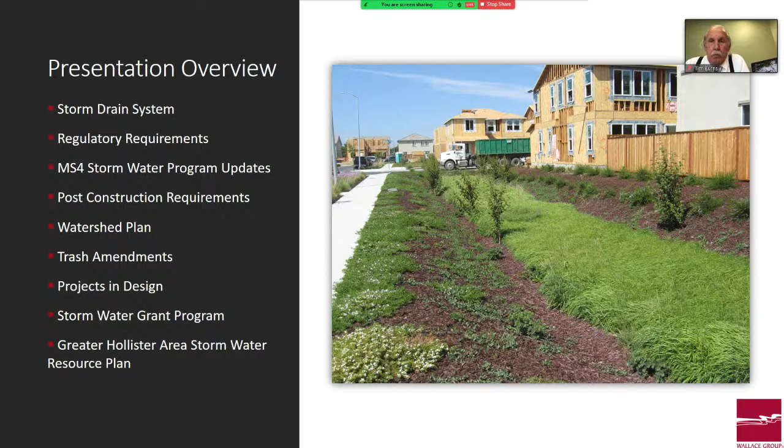We've been doing your utility master plans, stormwater being one of the major elements, working with the city on many facets of the stormwater components within your system, including infrastructure and regulatory requirements. Today we are going to present an overview of the storm drain system, regulatory requirements, your MS4 stormwater program, post-construction requirements, watershed plan, trash amendments, projects currently in design, the stormwater grant program, and the Greater Hollister Area Stormwater Resource Plan, which is actually the driving factor for this workshop today.

So a quick update on the storm drain system itself. Several years ago, Wallace Group completed a storm drain master plan. Your system is comprised of 59-plus miles of storm drain piping of various diameters, over 1,200 storm drain manholes, over 1,800 storm drain inlets, and 8 drainage basins, of which 4 are terminal basins and 4 are detention basins, meaning the water comes in, fills up, and then flows back out to the river. Then you have 20 river outfalls.

8 of them flow to the San Benito River, and 12 flow to the Santa Ana Creek, both of which are tributary to the Pajaro River downstream, going into Santa Cruz County and Monterey County.

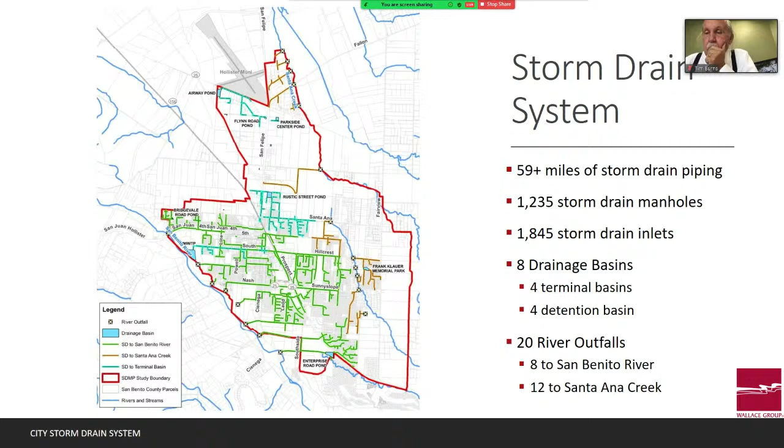So what work has been completed so far? In 2011, we did your storm drain master plan and identified 19 capital improvement projects related to stormwater. You can see a couple of the streets shown here. Fortunately, 2010 was a very wet rain year, so we were able to get several pictures of flooding areas and areas of concern.

The city has since completed one of those projects, the 4th Street Improvement Project, CIP 1609 and 1612. This was a road improvement project that also addressed stormwater improvements.

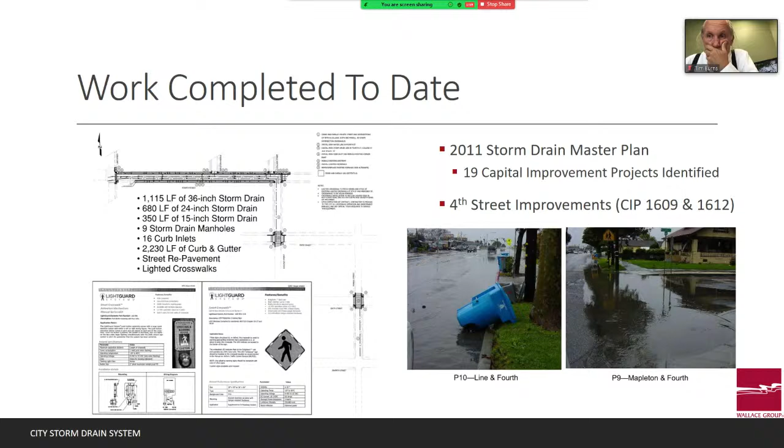Glenn Ryder has been working with the city over the past few years, assisting with MS4 compliance. He is unfortunately out sick, so I am going to attempt to convey the MS4 stormwater permit information, but I am not the expert on it, so please be gentle with me on this subject matter.

So what is an MS4? It's a Municipal Separate Storm Sewer System - M with 4 S's. This is the conveyance or system of publicly owned storm drains, gutters, roadside ditches, grassy swales, sediment ponds, and similar features. As stormwater flows over the land, it collects water, which also picks up a mixture of pollutants deposited by natural and human activities.

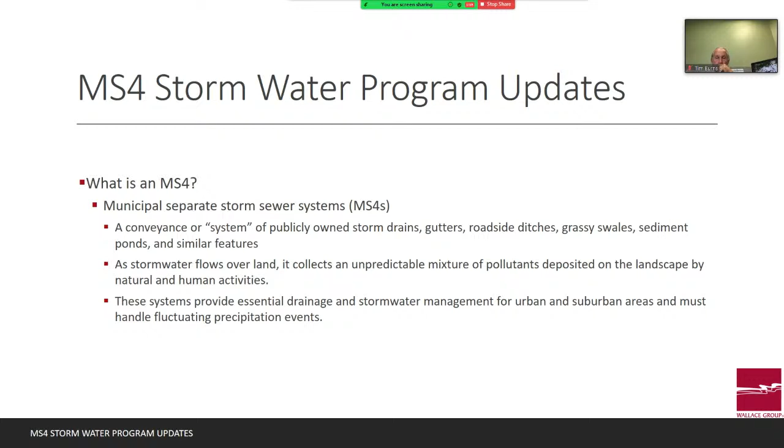So you've got oils and greases from cars, fertilizers, dog waste, and so forth. All of that gets picked up in the stormwater, flows to your gutters and drainage system, and out to the creeks. These systems provide essential drainage and stormwater management for urban and suburban areas and must handle fluctuating precipitation events, meaning your stormwater system has to be able to handle a wide variety of storm events over the years.

So what is the background with an MS4 permit? This is something that's on the newer side for municipalities. Back in the early 2000s, the Clean Water Act was a federal act that was enacted, and the National Pollutant Discharge Elimination System for MS4s. Phase 1 is over 100,000. You guys are in phase 2, which is 20,000 to 100,000 population.

This enacted the construction general permit. Subsequently, the California MS4 general permit includes total maximum daily loads, the trash capture order, and the regional order for the post-construction requirements. Those orders have come subsequent to the early 2000s when the Clean Water Act was enacted, implementing the MS4 permits.

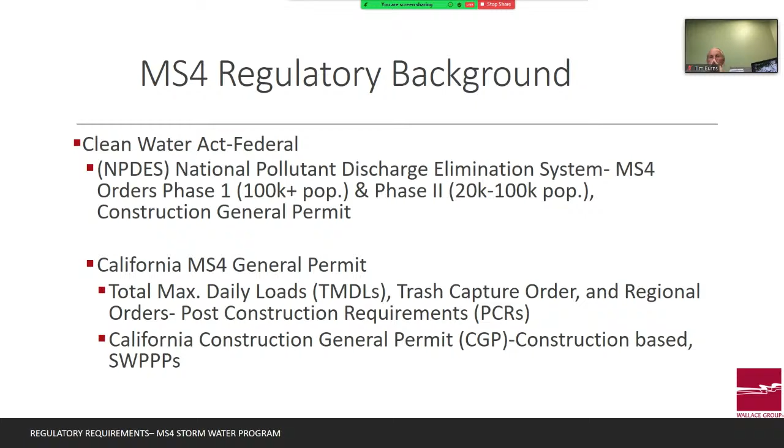Included in there is also the California Construction General Permit, which is oftentimes what you'll hear as the construction-based SWPPPs, Stormwater Pollution Prevention Plans. So these are all regulations that the city, as well as construction, either pre-construction or post-construction, have to comply with, as well as the city operations. So this is where we're all regulating different forms of stormwater before and after construction.

By the way, if you guys have any questions as we're going, this is a workshop. It's meant to be interactive. Feel free to interrupt me, ask me questions. I'm happy to answer them as we're going through the workshop.

Your MS4 system boundary. This is your city boundary. And what you're seeing is your city boundary and the various sub-watersheds within the city. All of these sub-watersheds flow to an outfall of some sort, and they go to the receiving water. So what is a receiving water? It's defined as a body of water such as an ocean, stream, river, pond, lake, and it's defined as where stormwater is discharged. This is where stormwater runoff collects and concentrates pollutants to impair recreational function of receiving water bodies by causing harm to aquatic life and potentially to humans.

So that stormwater collects on your streets. It collects all those pollutants, the waste, the oils, the greases, everything collects into the stormwater, and it heads out to San Benito River, where then it infiltrates into the ground. When the river is running, it is included there. The aquatic life, everything is inhibited by the stormwater, by those pollutants. And when you get large concentrations, that's when you start seeing aquatic life being harmed by these pollutants. It's something as a society we need to protect the environment.

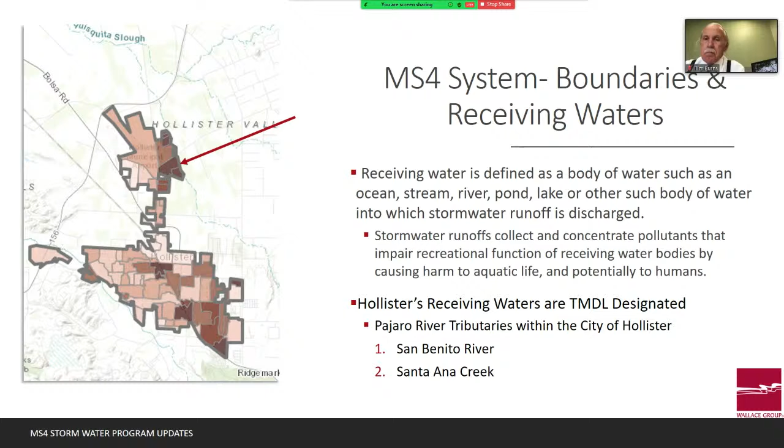So Hollister has two receiving waters, San Benito River and Santa Ana Creek. Those are the two rivers that we are focused on at this time. So I've talked about total maximum daily loads, and there's a lot of words on here. But basically it is a list of constituents that we have to analyze, that we monitor, and there are total maximum daily load limits that can enter the stormwater that once we go above that, it becomes harmful. We've identified them as being harmful to aquatic life.

And so one of the largest in each of San Benito River and Santa Ana Creek, what you want to pull from this, is the fecal coliform and the sediment have been identified as total maximum daily loads. The city has frequently surpassed the total maximum daily loads for fecal coliform and sediment, which means it's picking up waste and that is entering into the creeks and river. And so the Regional Water Quality Control Board, which is the regulating body, has identified those as issues and constituents of concern for the city.

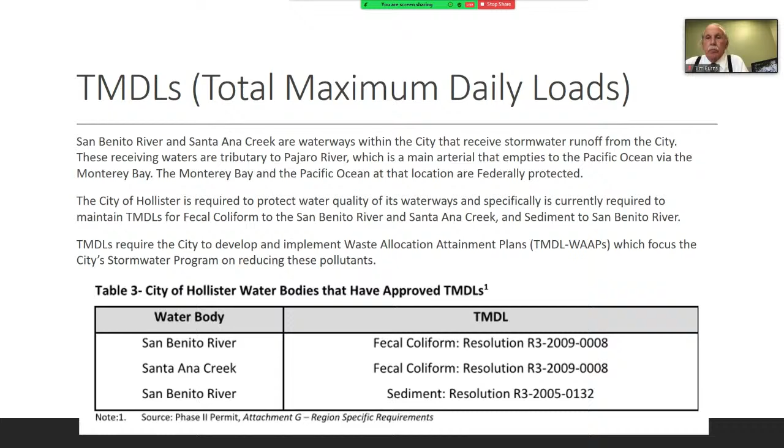So what are the minimum requirements for the MS4 stormwater program? It comes in two parts. The first part is what we have to measure. So we do planning, we do implementation, and then we assess it. There are 6 components to the first program. The first part is public education. That's why we send out newsletters in your water bills and so forth. We put information about trash capture, information about picking up your dog waste. This is all stemmed from these programs.

Public outreach, again, it's why we're having this workshop. It's the public education. The more you know and understand about how your trash impacts the water quality, the more likely you are to go and pick up that piece of trash when you're walking down the street and cleaning up the streets. Illicit discharge detection and elimination. We want to make sure that there are no illicit discharges, wrongful discharges into our stormwater collection system, that we are monitoring those connections.

Construction site stormwater controls. When a project is under construction, we do not want sediment running off of those project sites and into your storm drain system. That sediment is a major polluter to the river channels. As well as it's a maintenance nightmare to your operators, because they have to clean that sediment.

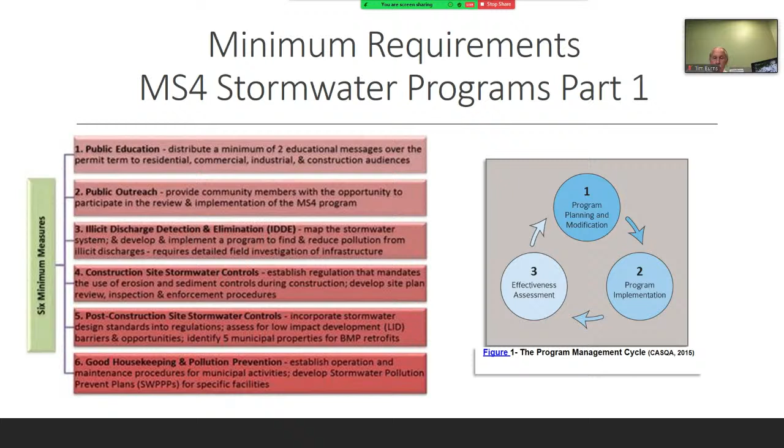Part 2 of the MS4 stormwater program is quantification of the pollutant loads and estimation of pollutant load reductions achieved by the program as a whole. So now we have all of these 6 programs that are implemented. How do you actually identify whether or not they're working? So the city has a program software. It's run by Second Nature.

It's a program where we have inputted all of your drainage information, all of your best management practices, the low impact development. Tell me if you don't understand some of these words that I'm throwing out there, but these are all stormwater improvements. We put them into a program that tells you how much bare land you might have, how much development you might have, and it identifies how much pollutant loading you might have going to a specific outfall.

And then, as the city is implementing new projects, we put those new projects into the program, and it then tells us how much reduction we've had in pollutant loading. So we know where the highest pollutant loaded areas are based on topography, based on bare ground, based on the urbanization of the streets, many different factors that go into it.

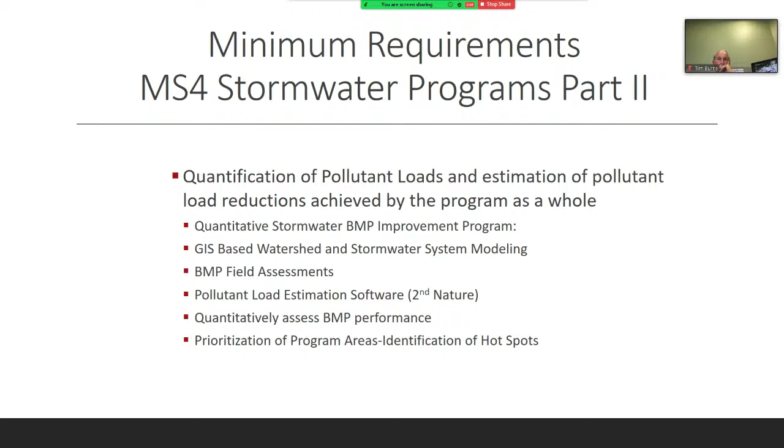And then we identify and target the best management practices that we can implement, either operationally or physical projects that we can put in, and then we identify where and how we're going to reduce those pollutant loadings. So that's part 2 of the program.

So what has the city done to date? First off, we have a GIS-based storm drain model that has identified all of the watersheds within the entire city. We've done a quantitative analysis using a scientifically defensible pollutant load analysis, the Second Nature program, and we've prioritized the priority areas for required municipal inspections.

So we have to go out every so often and actually inspect those detention basins, the physical facilities, full capture systems, whatever we might have, to make sure that they are living up to their design parameters. The city has prepared a TMDL-WAAP, which is a monitoring program that has to be done. The biggest thing is making sure that you do it after what we call the first flush.

The first flush is the very first storm of a rainy season. That is the storm that is going to carry the highest pollutant loading. You drive all summer long, all your cars are leaking oil, gas, everything, and all the pollutants collect over the summer. That first storm is going to have the highest pollutant loading of the season, and so we call that the first flush. That's the one that is most important to collect stormwater and treat it.

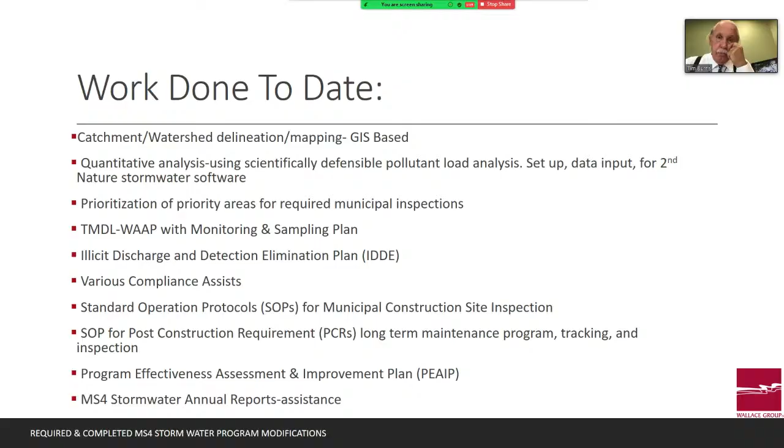Maybe you could help visually. The storms of 96, 97, what did they rate at? Where we had a lot of rain and the river was knocking down some bridges. Do you know what that was rated? Let me see if I can look it up, and I can get back to you. Thank you. Valerie, if you're listening, maybe you can look it up and text it to me. Or when she gets on here shortly, she might know the answer.

Any other questions? All right, moving on. So Valerie's going to now talk about post-construction requirements. Go ahead, Valerie. Oh. She's still muted. Good evening. Want to confirm that everybody can hear me? Yes, we can. Excellent. Thank you. And thank you, Carrie, for the introduction.

So tonight I will be talking about the post-construction requirements, otherwise known as the PCRs. These are requirements that were developed by the regional board with the goal of reducing pollution that reaches our waterways and also minimizing erosion and other impacts to the creeks and streams. And these PCRs are required through your MS4 stormwater permit that Carrie was describing. Next slide, please.

So first I'll go through a brief overview of what the post-construction requirements are. They are a set of 4 different tiers, each having a different level of care for stormwater. The tier system is based on the amount of new or replaced impervious surface that a project will create, which is important because these requirements also apply to redevelopment projects.

There are some exemptions for maintenance, such as repaving or overlaying an existing roadway. Tier 1 is called site design and runoff reduction, and it requires that you include some form of low impact development in your project. That means trying to hold water on your site by directing runoff to a landscaped area, or possibly including a rain garden, a low-lying area on your site that would hold stormwater and not allow it to run off.

Tier 2 is water quality treatment, and the regional board has identified a specific storm for which you have to treat all the runoff. This can be done in a landscape-based feature, like some type of vegetated swale, which would be considered low impact development and is preferred by the regional board. Or water quality treatment can be achieved in more of a mechanical means, which would be some type of filter system generally placed underground in connection to your storm drain system.

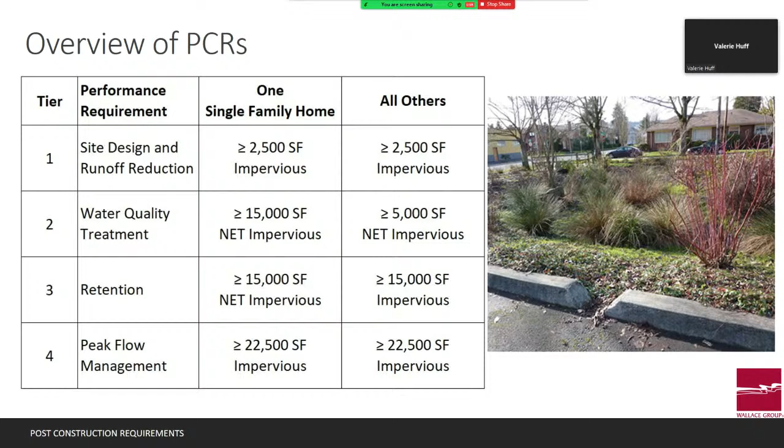The city has identified and understands that implementation, meeting these PCRs on each project site, can be a challenge. It's especially a challenge for project sites that have a more dense clay type soil to try to hold a lot of water on their project site.

So working with the city, we have been developing what's called a watershed plan. That plan is specific for an alternative compliance for the post-construction requirements. The PCRs are intended to be implemented on each project site, but by having a regional program such as a watershed plan, the PCRs can be met in a regional facility, such as a larger basin. This has benefits for both the city and the community.

Primarily for the city, this will reduce the time, effort, and complexity of your operations and maintenance program. As Carrie mentioned, for every stormwater facility constructed to comply with the PCRs, the city is now required to track the operations and maintenance and make sure those facilities are maintained, at minimum on a yearly basis, and that needs to be reported back to the regional board as part of your MS4 permit.

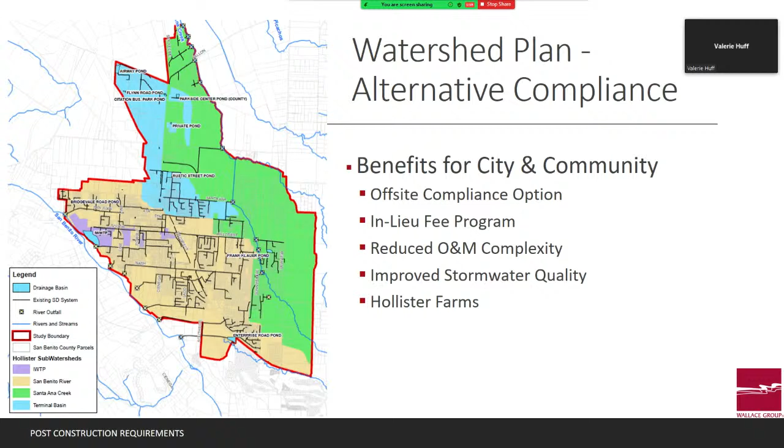Next slide, please. So what the Watershed Plan is proposing is that we would be diverting runoff that currently flows to the San Benito River. The Watershed Plan would apply to any development within a watershed that drains to the San Benito River, and that diversion would occur by sending runoff to the existing industrial wastewater treatment plant, shown there on the left.

The Watershed Plan proposes that Pond 2, an existing retention pond, would capture stormwater runoff. Then, if needed, that stormwater runoff would be pumped to the existing percolation ponds and percolate into the groundwater before reaching the river.

The primary diversion would occur at the existing storm drain outflow that currently discharges near Apricot Lane. The Apricot Lane outfall is just on the south side of Pond 2, and the primary diversion would send runoff from that outfall to Pond 2 instead of the river. We've also identified a few upstream locations where we could divert even more runoff through that Apricot Lane outfall.

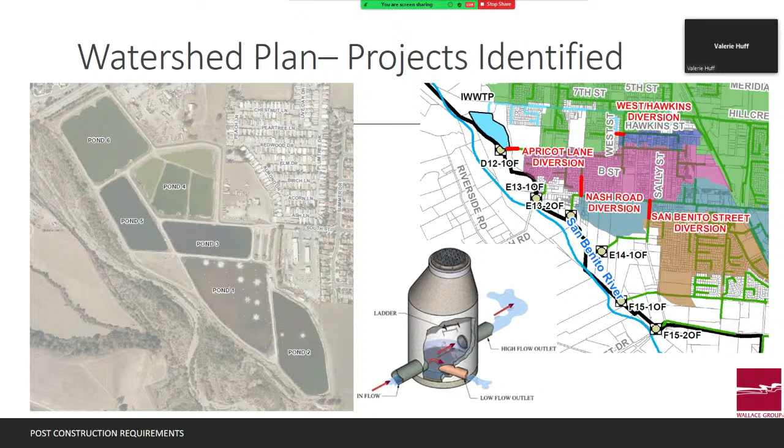And I'm ready for the next slide. Thank you. So there are some programmatic requirements through the regional board that would come along with the Watershed Plan. First would be an alternative compliance ordinance—this would be a new section in your municipal code outlining the requirements developers would have to follow to use this alternative compliance program.

Second would be the in-lieu fee program. This program would need to be developed and codified to specify what a developer will need to pay in order to use alternative compliance.

There's also compliance tracking—just as the city is required by the regional board to track operations and maintenance of PCR facilities, you also need to track how you're managing compliance if developers choose this alternative route. The city will also need to identify O&M procedures for any facilities used under this alternative compliance program, primarily the industrial wastewater treatment plant. By using the industrial plant for PCR compliance, the regional board now has the authority to request O&M documentation for that facility, and that's important to understand.

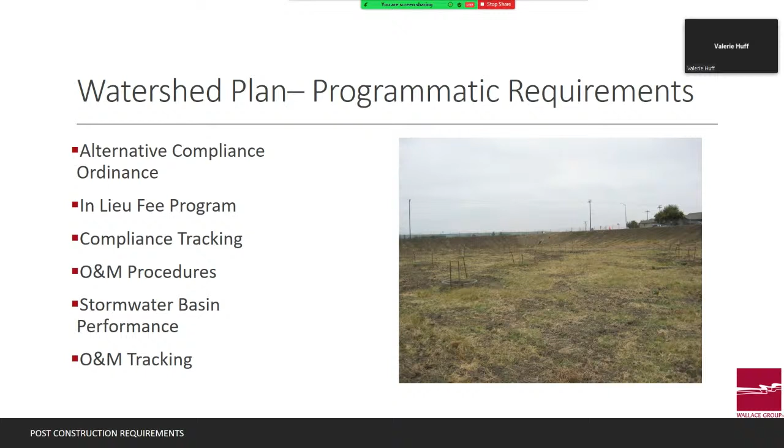So where are we with the development of the watershed plan? We submitted a draft, our first draft, to the regional board back in 2015, and we have gone through a number of rounds of comments with them back and forth. We are at a point where the regional board has stated that with some minor revisions, they are ready to approve the plan. It's undergoing final city review right now for submittal to the regional board.

After that watershed plan is approved, the next steps would be development of the in lieu fee program, updates to the city's municipal code, and also developing and finalizing tracking procedures for how the city is going to manage and demonstrate to the regional board which projects fall under this alternative compliance option.

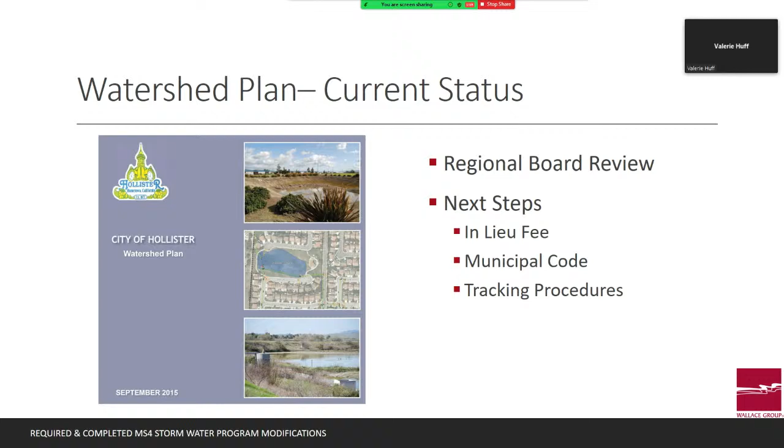I'm going to talk briefly also about the trash amendments, and then I'll stop for questions after I get through this section. Similar to the post-construction requirements, the trash amendment is a requirement through the MS4 permit program. The purpose of the trash amendment is to try to prevent trash and debris from entering a storm drain system. The State Water Board developed the trash amendment, and now the city is in charge of implementing it.

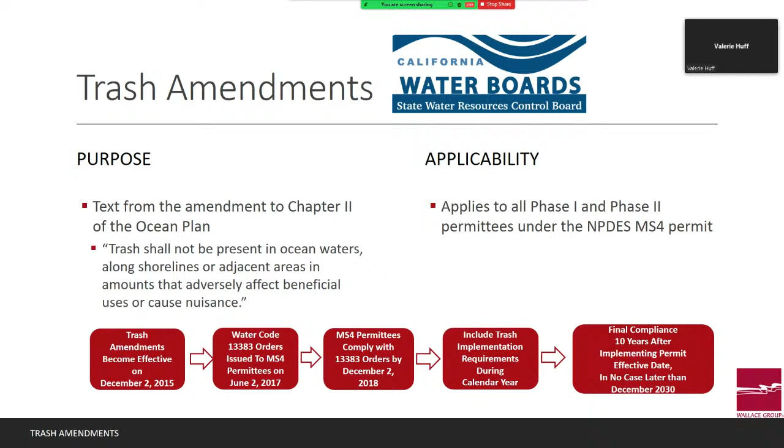Let's go ahead to the next slide. In 2018, Wallace Group worked with the city to develop a compliance memo for the trash amendment to identify the path forward. The city at that time chose what's called a full trash capture system. The intention is that a trash capture system would be installed at all of the major outfalls to either the San Benito River or Santa Ana Creek. Just of note, the Bridge Road outfall is the largest, and that's the most northern outfall to the San Benito River.

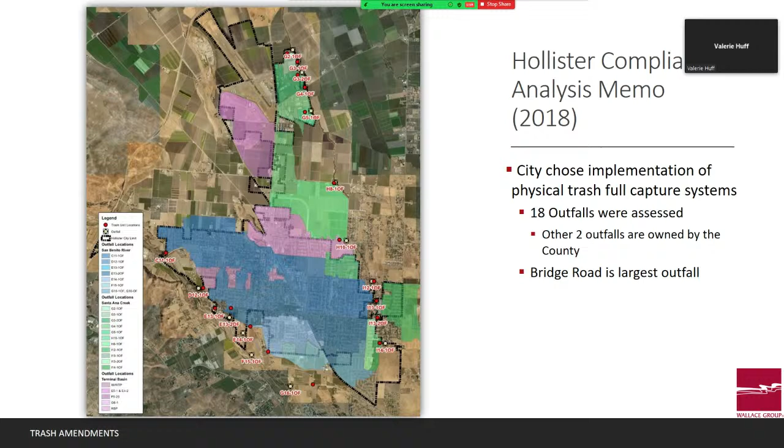A full trash capture system is a mechanical device that would capture all particles 5 millimeters or greater. So that's really small, down to the sediment level. Here we're treating water for not only the large debris, bottles, trash and leaves, but also some smaller particles that may have entered that stormwater system.

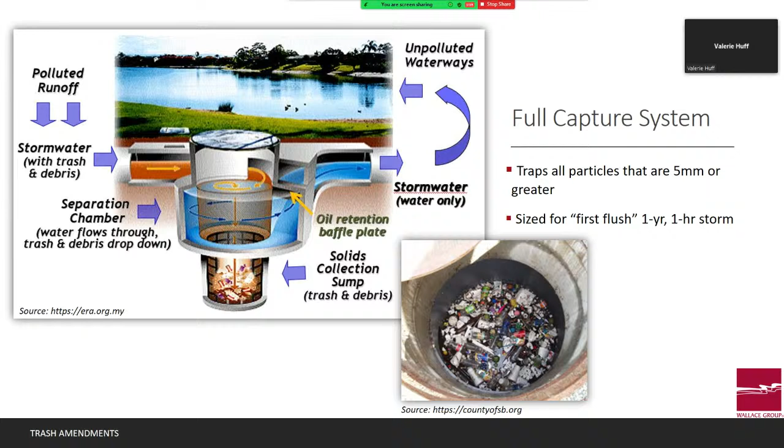These full capture systems are sized for the first flush storm, which Kari had described. This is typically analyzed as a 1 year, 1 hour storm. This is a typical storm you might see during the beginning of the rainy season that would mobilize all these pollutants that have been collecting in the storm drain system and in the right of way.

Next slide, please. Great. And so that's the end of my discussion specific to the PCRs and the trash amendment. I'm happy to take any questions that you might have before Kari jumps into some more detailed discussion on where we are in design of some of these projects. Is there any questions from anyone?

Councilmember Resendez? Thank you, Mr. Mayor. I do have a couple quick questions. So in regards to the watershed plan, are there any more cons or downsides? I saw you talk about a lot of the pros, and then you did talk about some programmatic requirements, but are there any other cons or downsides aside from what you touched as far as the programmatic requirements?

Sure. So the one con that's really specific for the city is that the first project we propose to implement for the watershed plan is the diversion of that Apricot Lane outfall. That's a sizable project that diverts a sizable volume of stormwater. So there's some potential that we move forward with the watershed plan, divert all that water, and then there's maybe not a lot of buy-in from the development community that wants to use that alternative compliance option. So there's some potential that your in lieu fees may not generate as much as we would like. Kari can talk a bit more specifically about where that project is in design and how it relates to some other stormwater requirements for the city. But in terms of cons, that would be the biggest one: you have to take a leap of faith to construct one of these projects, assuming you have one or two developers that want to buy in, and then you're counting on future developments to continue to pay those in lieu fees.

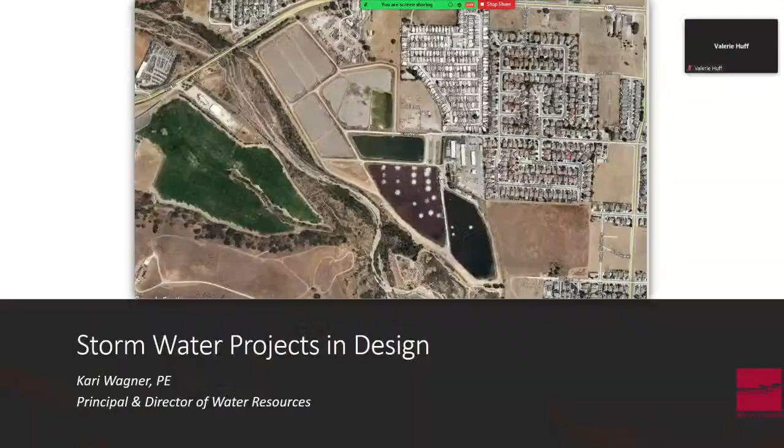Now we're going to talk about what stormwater projects are actually in design right now. We've talked a lot about upgrades to the industrial wastewater treatment plant. I've worked with the city council for several years on issues and discussions about San Benito Foods and the industrial wastewater treatment plant project. Let me give some background on the plant for anyone unfamiliar with the facility.

Pond 1, as labeled in this picture, is exclusively used at this time for wastewater treatment by San Benito Foods. The city has worked with San Benito Foods over the last couple of years, and they are now the sole operator of that facility—the city no longer operates or maintains that pond. They operate Pond 1 year-round but only treat wastewater during the summer months, June through end of October, which is almost finished as of today. Once they finish their canning season, they continue to operate and maintain Pond 1 but no longer discharge. During summer, they're allowed to discharge effluent to ponds 3, 4, 5, and 6, which are the percolation basins.

During the winter season—prior to this past year—Pond 1 used to overflow into Pond 2, which would then pump to ponds 3, 4, 5, and 6. We bifurcated ponds 1 and 2, telling San Benito Foods they are only using Pond 1. They've made improvements to Pond 1 for proper treatment of their effluent wastewater. The city is now retaining Pond 2 for stormwater capture. We've desludged Pond 2 and are in the final stages of that project, getting it prepped and ready for the diversion project.

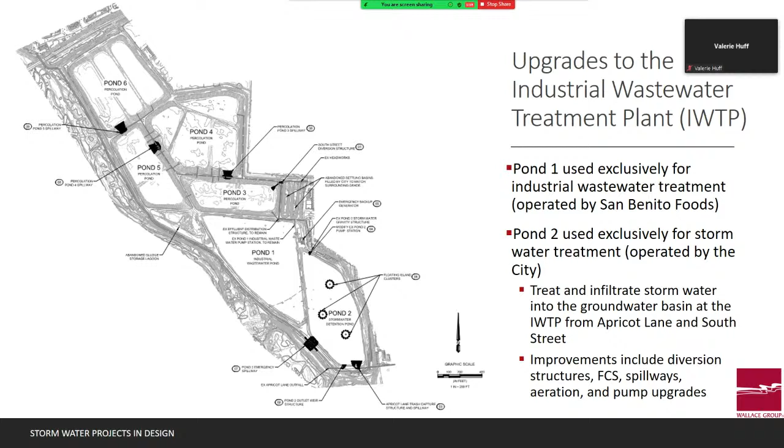So to wrap up this workshop, I will be going over the Stormwater Grant Program and the recent application that the city applied for, and the subsequent work that was required based on that grant program.

The Stormwater Grant Program is through the California State Water Resources Control Board. Its primary mission is to promote beneficial use of stormwater and dry weather runoff in California, and it does this by providing financial assistance through funding available through Prop 1, Assembly Bill 1471, authored by Rendon, which authorized $7.5 billion in water projects, and of that total, $200 million in grant funds were allocated for multiple benefit stormwater management projects.

Last year, round 2 of the Prop 1 grant funding was available for project applicants. In July of 2020, the city of Hollister applied for this grant funding, and the industrial wastewater treatment plant upgrades that Carrie was just describing were used as matching funds of $4.7 million. The trash capture project for Bridge Road, the largest watershed to the San Benito River, was used as the grant fund.

Earlier this year, the list of projects that were selected were published. Unfortunately, the city was not on that list, but we had discussions with the state. They said the application was favorably reviewed and that we were placed first on the standby list. So we're currently working with the state on that application.

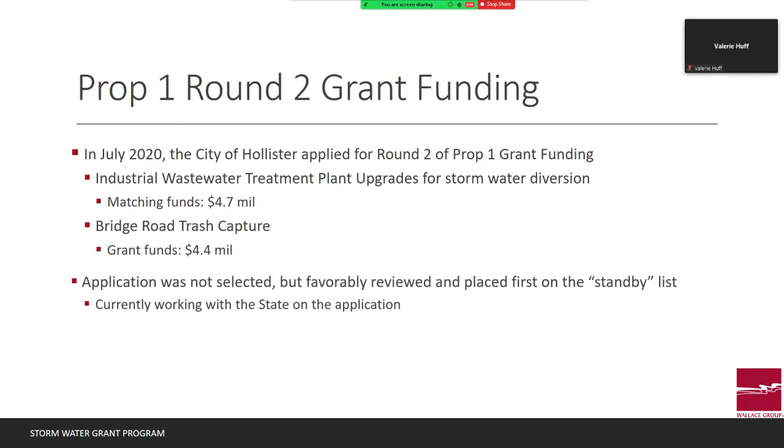As part of that grant, there is a stormwater resource plan requirement. So a stormwater resource plan is a condition of receiving grant funds for stormwater and dry weather runoff projects. And this comes from the water code and is implemented from any bond approved by voters after January 2014.

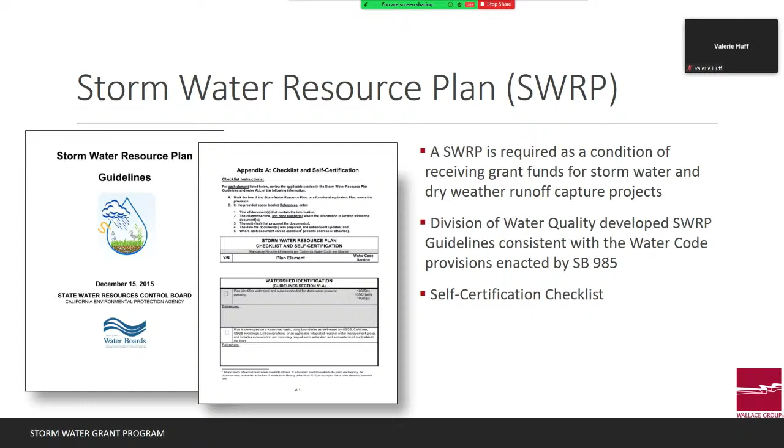So the Division of Water Quality developed stormwater resource plan guidelines consistent with the water code provisions enacted by Senate Bill 985. And in these guidelines, there is a self-certification checklist, which there's just a screen capture of what that looks like. And these help guide local agencies and people preparing the stormwater resource plan to make sure that it is consistent with the water code and the state water board guidelines.

So why is the stormwater resource plan important? Well, the key here for this type of plan is that it focuses on being a watershed-based plan. Traditional approaches to stormwater, like we've been talking about, typically include maybe limited treatment prior to the stormwater entering the storm drain system, and ultimately the receiving water bodies.

The focus of a stormwater resource plan is to focus on the natural hydrology within the existing landscapes in order to increase stormwater capture and use, and really manage stormwater as a resource and not something to just treat and discharge into our receiving water bodies. So a stormwater resource plan encourages multiple benefit projects, and it also incorporates the broader water management goals of the Integrated Regional Water Management Plan, the IRWMP, which in the city of Hollister's case is the Pajaro River Watershed IRWMP.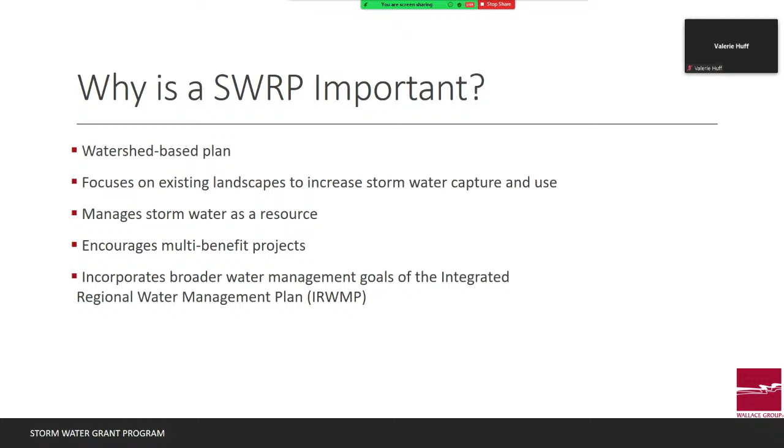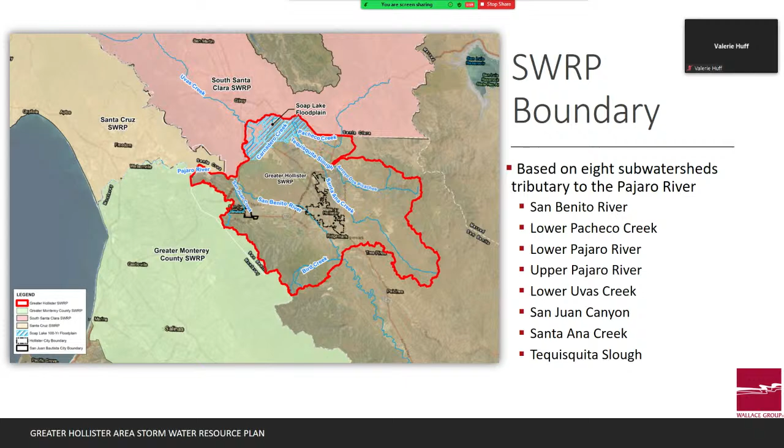So we really wanted to highlight agency collaboration. The City of Hollister is the submitting agency for when this plan gets submitted to the State Water Board. But we wanted to highlight that this has been a collaborative effort with City of San Juan Bautista, San Benito County Water District, and Pajaro River Watershed Flood Prevention Authority.

So for the identification of each of the stormwater projects, really back to focusing on that watershed-based planning approach in order to find projects that not only address water quality concerns, but also might have a flood control benefit, a water supply benefit, a groundwater management benefit. We solicited the different local participating agencies to help identify stormwater, dry weather runoff capture projects to include in this plan. And that resulted in 8 projects, 3 programs, 4 opportunities. 5 of the projects are within the city of Hollister and directly benefit the San Benito River. And this exhibit shows some of the different project components for the city's identified stormwater projects.

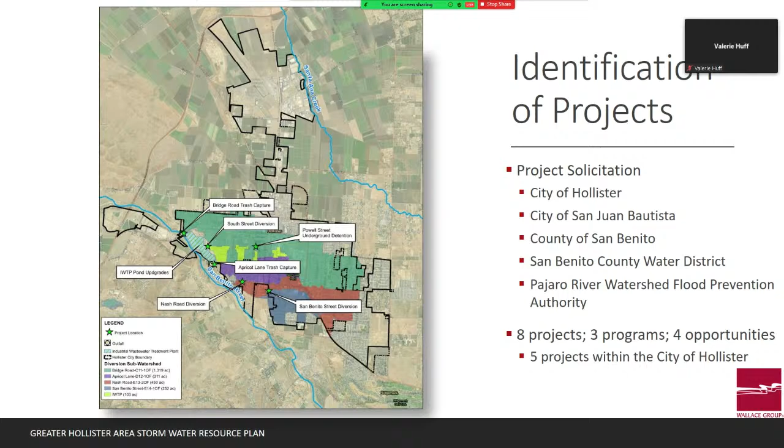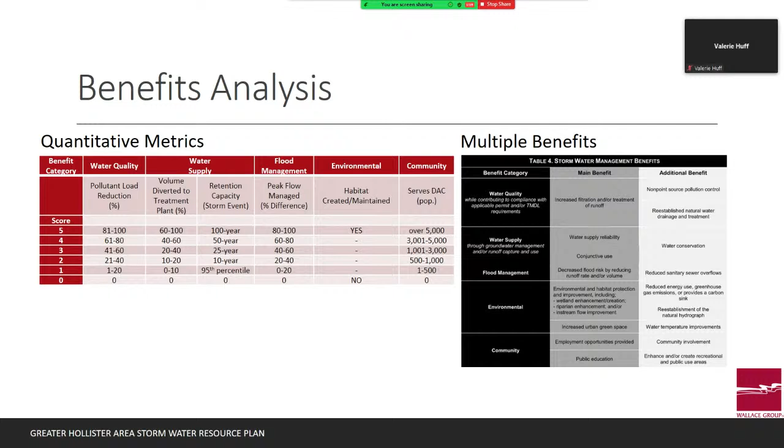So with the identification of the projects comes the benefits analysis. Each project was broken down into a quantifiable metric, which is shown in the red table. Using results from the stormwater modeling that had previously been done, we looked at several other studies that had different hydrology and modeling results. And there's also multiple benefits. This gray table is straight from the Stormwater Resource Plan guideline published by the State Water Board. It breaks down the categories into water quality, water supply, flood management, environmental, and community, and those are broken down into main and additional benefits.

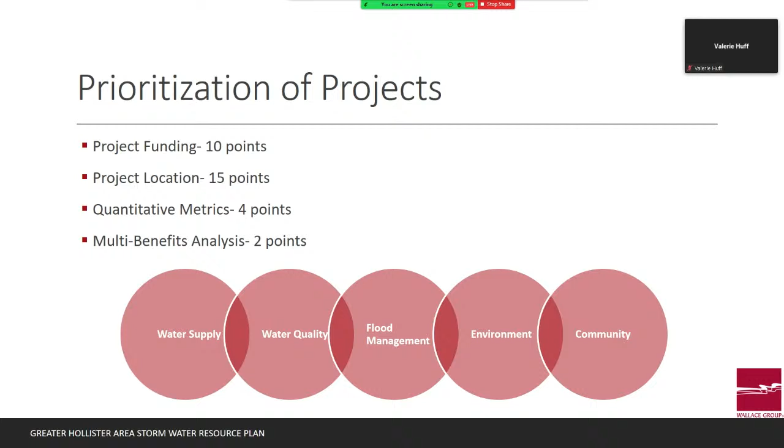So with that benefits analysis comes the prioritization of the different projects. If grant funding was secure, the project received 10 points. If the project was located on publicly owned lands, the project received 15 points. Quantitative metrics 4, multiple benefits analysis 2. And there was a total possible score of 100 points.

But it's really important to note that with this Stormwater Resource Plan, just the fact that these projects are identified in this plan, like I mentioned before, makes them eligible to receive that grant funding, regardless of their prioritization on this table.

So moving forward with an overview of all the projects that were identified in the Greater Hollister Area Stormwater Resource Plan. We have the industrial wastewater treatment plant upgrades that were scored the highest priority based on pollutant load reductions to San Benito River. We have the benefits to water supply through the infiltration of the percolation ponds, environmental benefits and community benefits in the upstream watershed area that actually has portions designated as disadvantaged communities.

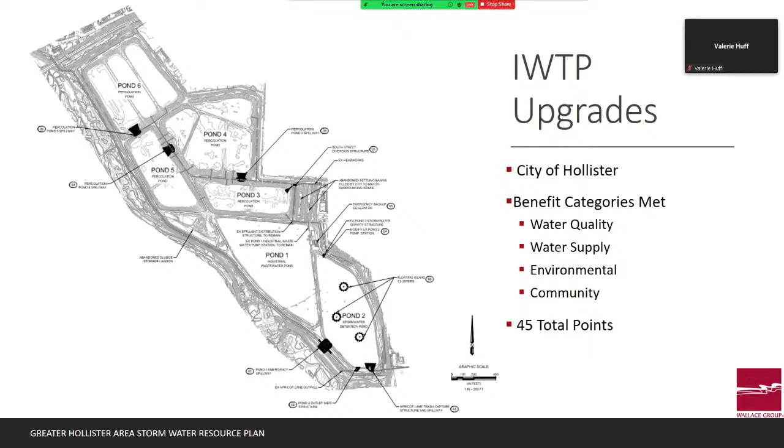The next project is the Soap Lake Floodplain Preservation Project. This project was identified by the Pajaro River Watershed Flood Prevention Authority. And this is based on flood risk reduction project for the lower Pajaro River. It's included in this plan to control flooding in the downstream disadvantaged communities of Watsonville and Pajaro. And it does this by maintaining the existing environmental habitat through the purchase of conservation easements.

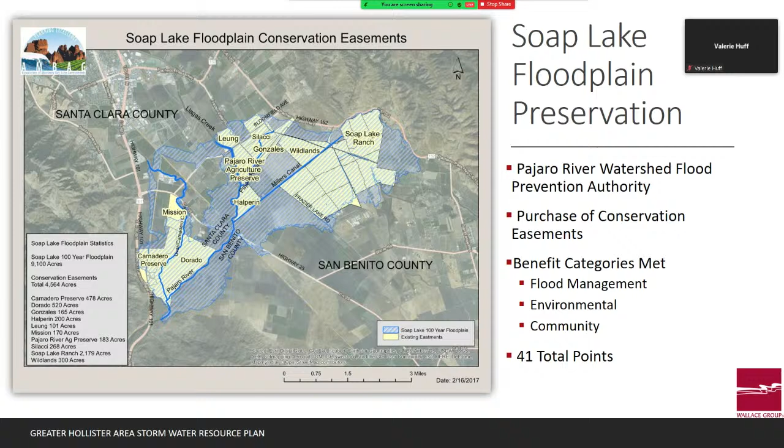Next up is the Pacheco Reservoir expansion. Now, this project was identified in the Santa Clara County Stormwater Resource Plan, but it was also important for us to note in the Greater Hollister Area Stormwater Resource Plan because this project directly benefits the Pacheco Creek, which the lower Pacheco Creek has portions in San Benito County and is within our Greater Hollister Area Stormwater Resource Plan boundary.

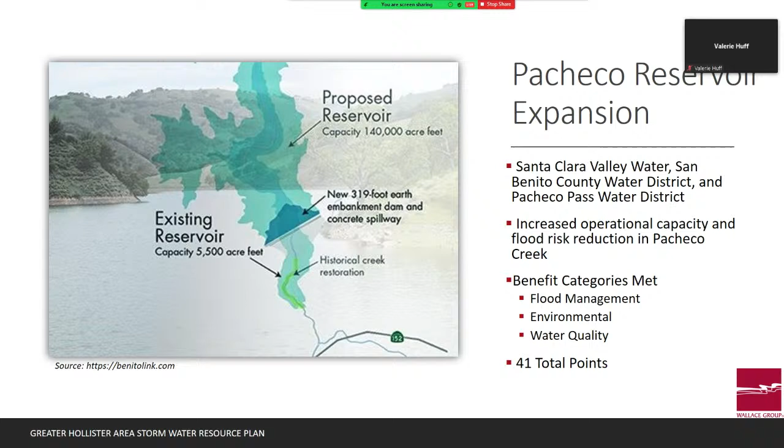So this project, by boosting the operational storage capacity from 5,500 acre feet to 140,000 acre feet, has the ability to reduce peak flows in Pacheco Creek by 60% and also stabilize the drying of downstream wetlands in order to improve water quality and, as we mentioned, fish habitat.

The next project is the San Juan Bautista Wastewater Treatment Plant Project Regionalization with the City of Hollister Regional Domestic Wastewater Treatment Plant. This project was identified based on water quality benefits of reducing pollutant loads to San Juan Creek, which is tributary to San Benito River. And this project reroutes wastewater flows to the city's regional domestic wastewater treatment plant where it can be used as recycled water or for infiltration.

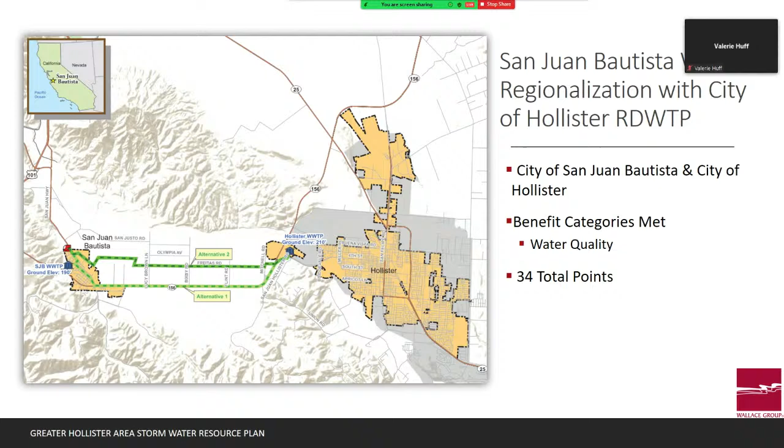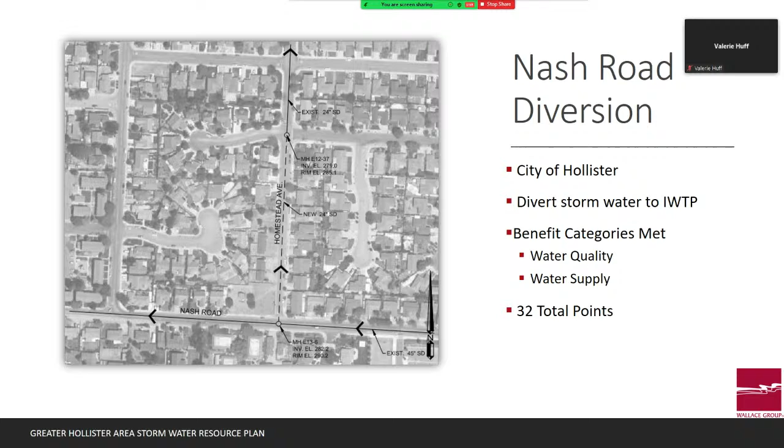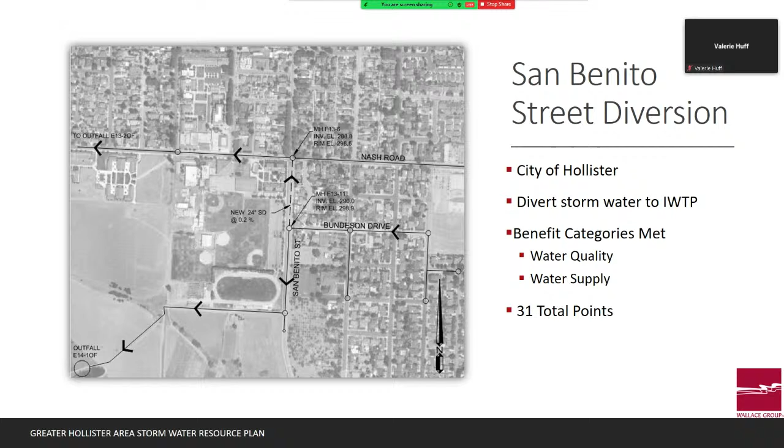Next, we have the Nash Road Diversion, and I'm gonna go ahead and tag on the San Benito Street Diversion too, because they're very similar. These were both identified as upstream diversions needed to divert stormwater to the industrial wastewater treatment plant. So this just has to do with existing stormwater flows, and instead of getting sent directly to San Benito River, these projects are proposing to send them to the industrial wastewater treatment plant for infiltration instead of sending that untreated water to San Benito River.

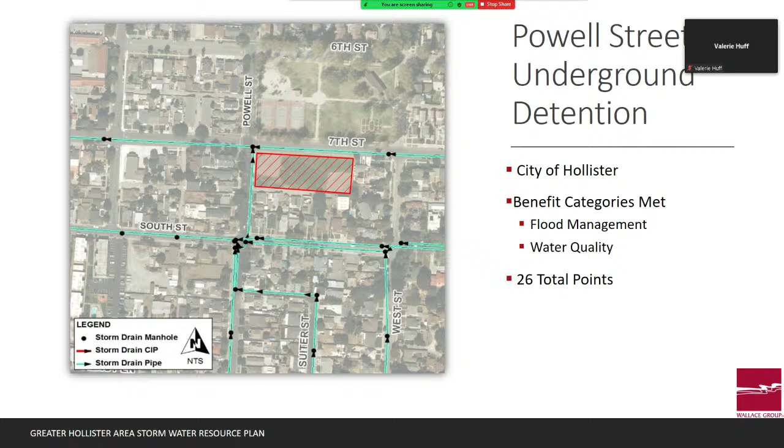The last project is Powell Street Underground Detention Project. This was identified in the city's storm drain master plan. And this project was identified to provide flood protection in this intersection in this area. And it has the potential to improve water quality if designed with a stormwater infiltration element. So those were a brief overview of the projects that were identified in the Stormwater Resource Plan.

The next steps for this process are to submit this plan to the State Water Board for concurrence with the Water Code. Once we receive concurrence and approval with the Water Board, we will present to City Council for adoption of the Stormwater Resource Plan. And finally, the last step is to submit to the Regional Water Management Group for incorporation into the Pajaro River Watershed IRWMP.

So that's a brief overview of the Greater Hollister Area Stormwater Resource Plan, and that's actually our conclusion to the stormwater presentation as well. I can take questions specifically on the Stormwater Resource Plan, and Carrie can come up here too if there's more. I'm sure there's lots of questions. Yep. We can go back to your question regarding Bridge Road if you would like. Okay. Do you want me to go back? Yeah, go back to that slide.

So is that what that square building is? Yeah, if you were to go out to Bridge Road, the outfall is that little black square at the very end of that line. That is your current outfall. This line is 42 inch. The storm drain line? The existing storm drain line, 42. 42 inch. So it's a pretty large storm drain. And again, this is the largest outfall.

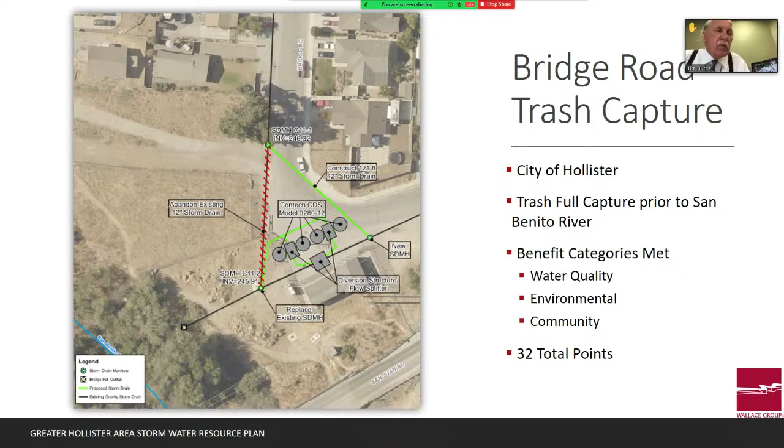I appreciate it. Thanks for your response. I think you had a great presentation. I'm not smart in this area, but I'm a little smarter today than I was yesterday, and I thank you for that. Mayor, that concludes my questions and comments.